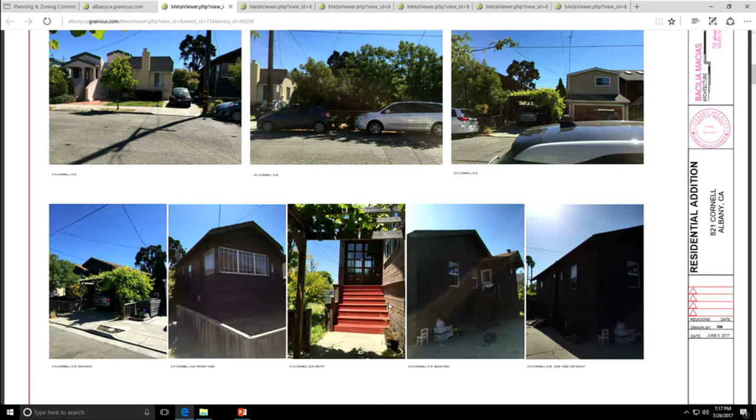This was presented to the full commission at the last hearing on July 12th. At that time, the commission continued it to a date certain of July 26th, pending some design revisions, including the garage door, some modifications to the rear French doors and deck landing, and then also some modifications to the landscape plan. And so the architect made those revisions, which are before you tonight. In fact, this is the garage door revision, which warranted quite a bit of discussion at the last hearing. We have other elevations that we can show you, but that's kind of the project scope in a nutshell.

And you received some correspondence within the last hour from adjacent property owners regarding this project. You say there have been communications. Okay. And can I ask a question of staff? From staff's perspective, were there any changes in the landscape plans that were submitted? I know that was also the topic of a lot of conversation. Yeah, there were some modifications that were made to the landscape plan, as I understand it. And we can let the applicant speak to the specifics of that. Okay, I have that same question. Any other questions?

No. All right, then I'd like to open up a public hearing before we move further on 821 Cornell. Is there anyone in the audience who'd like to address the commission on this project? Feel free to come up to the microphone. At some point we need a speaker card from you. We're going to have the applicant speak first. This is not the applicant. Okay, that's good. Is the applicant here? Yep. My name is Maura Baldwin, and I'm the landscape architect on the project, so I'm the one who addressed all the landscape issues.

Should I just review it or answer questions? Maybe you can just tell us how you responded to the comments from the last meeting. Do you have an image? It's loading, it should be coming up. Bear with us. Thank you. So I think the major issue is screening, but there are some other issues.

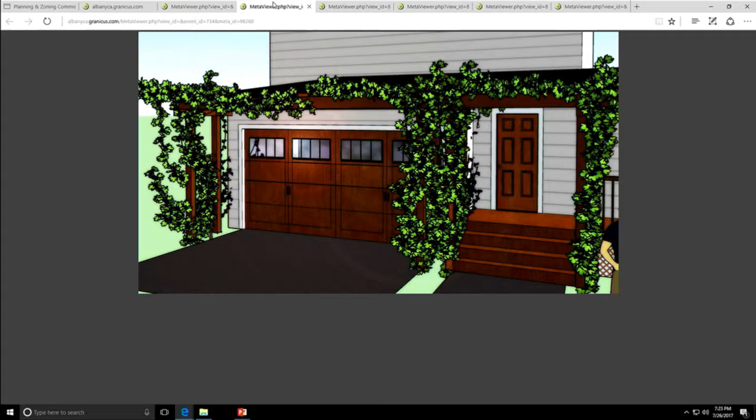Also, we wanted to illustrate that we did propose a trellis to be part of the overall front facade of the project, and working with the landscaper, we're proposing potato vines to be climbing around there so that they're evergreen and produce a nice flower. That was always in our minds because it's something that the client really enjoyed about what he has now. So I just wanted to illustrate in this graphic that the garage door, even though it is recessed, we did take some time to fine tune it a little bit.

Okay, good. Any other questions for the applicant? No? All right, good, thank you. If we have other questions, we'll call you back. Great. Okay, now, public hearing. Do you have speaker cards? Yes, we do have one speaker card. Okay. For Linda Haymaker. Okay, great.

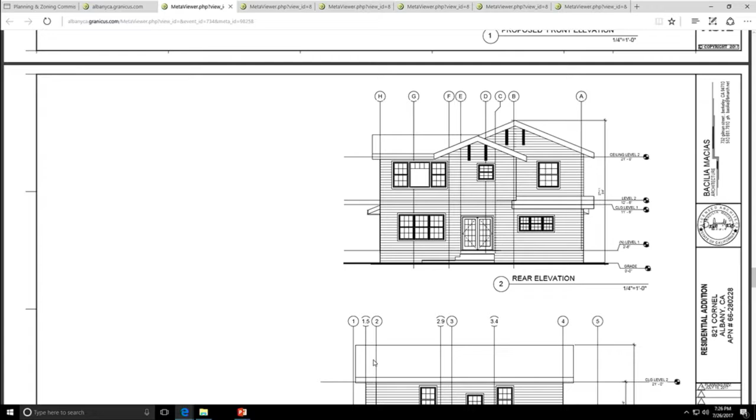And we asked if they could maybe put a small porch around it to possibly go to the side, and they said that they would consider that, or something to mitigate this direct head-on approach that would be much more intrusive to our sense of privacy and enclosure and noise issues and things like that. And I didn't see that anything was done about that.

It seems like on the deck there, if there was some problem about doing any kind of a porch enclosure, maybe they could put something on the east side of the deck that they have, directly opposite the doors, that was about 8 feet with maybe trellis on top of that, so that every time they come in and out, we as neighbors are not directly looking at them and feel sort of intruded upon. So that would be the same suggestion that we had last time, that they might address that a little bit rather than not. And we didn't feel that they did take that into consideration.

Then the rest of my issues are about, a big issue was about the terrace size. And from the plans that were submitted, it looked as though what they had proposed last time was a very large rock terrace. But when I looked at the revisions, what they wrote was that they had proposed a lawn and that we didn't like the lawn. We would love a lawn because a lawn is much quieter than rock and hard surface. So if that could be put back in the original plan as a lawn, that would muffle a great deal of sound in the back, reverberating off of these large surfaces.

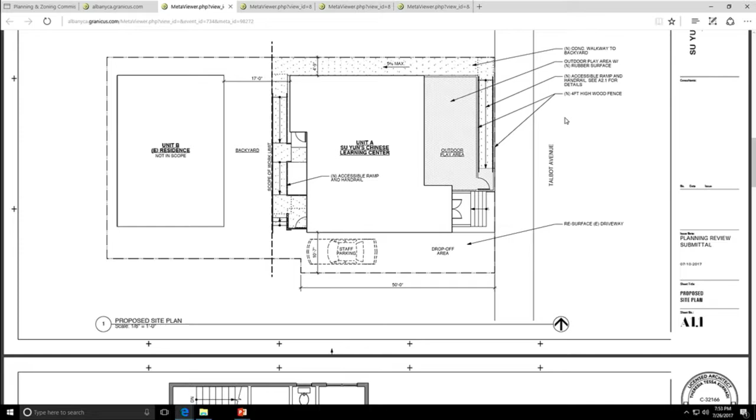Okay, thanks. So one question too. The two off-street spots you have are what's shown behind you? Right. Tandem parking? Okay. And right now, half of that's landscaping? No. Oh, I guess maybe it's an old picture. It's been ripped out. Well, I see the driveway sort of thing back there. All right, got it, okay.

Yeah, so the building owner is currently renovating this building as well as the rear building. And they're doing some municipal work with electrical and the gas, so they are going to repave the driveway. I think once the building's been painted, the repaving of the driveway and, not to be offensive, removing the blight that is currently the front yard is part of the capital improvements that we plan to make, along with the building owner, to really overall improve the lot, the structure and the land.

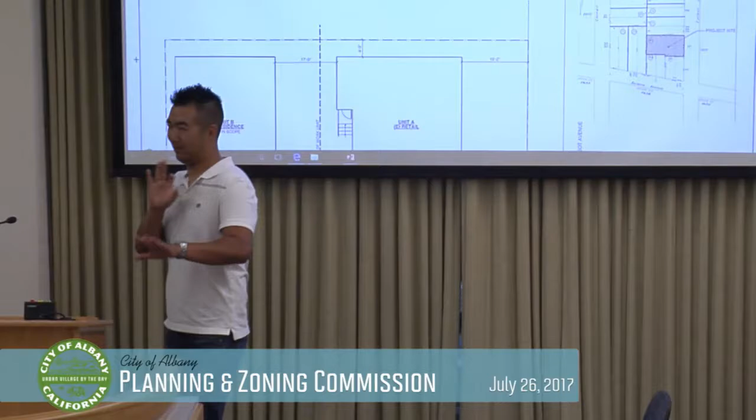So the building to the north, there seems to be a big swath of driveway. That all belongs to them? Correct. Right here, there is a pathway. You got to turn to the staff. I believe that's currently the plan for the foot access to the rear building. Again, we don't own either facility. That's access to the rear.

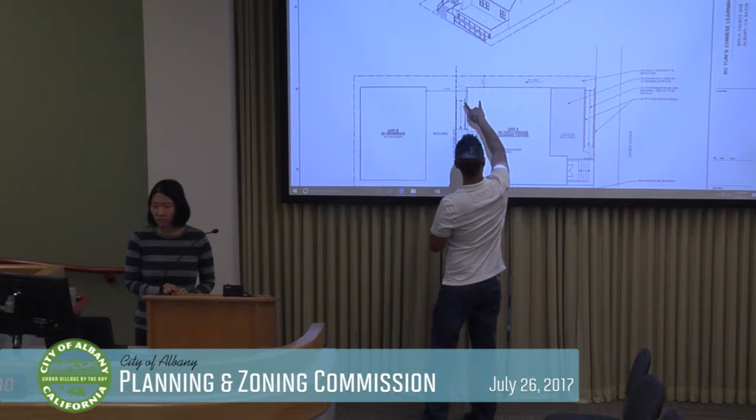Okay, got it. But you saw in one of the plans, because we do want to make this ADA accessible, we're working with the building owner to make basically a 5% grade and allow wheelchair access, since currently the building is not ADA compliant. You can't get to it. But the ramp, working with our architect, was the only way that we could actually do it.

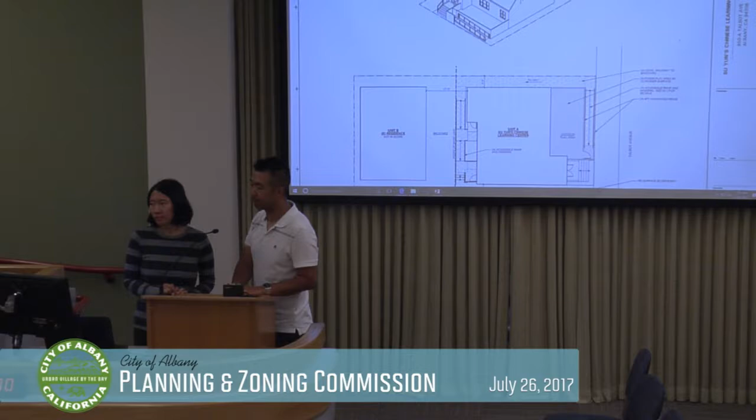Okay. Good. Any other questions? No? Okay, thank you. We'll call you back if we have some. Thank you. Oh, I have a question of staff, I think. Sure. Yes, of staff.

So some years ago, I was on a commission when VARA was approved. Did you pull the files on that at all? And I did indeed. You did indeed? Okay, good. I remember discussion about bicycle parking on that. And then I will admit, I did a lot of Saturday morning yogas there and I always rode my bicycle. Yeah, we required bicycle parking because of the traffic. We've put our standard condition of approval with this use permit to provide a bike rack as part of the business. So they will have to do that as part of their building permit improvements.

And do you know how the usage projections for VARA, when they got their use permit, compared with this project? Yeah, so it was actually a higher intensity use overall because the business had operating hours of 9 a.m. to 9 p.m. Monday through Saturday. So that compared to 1 p.m. to 6 p.m. Monday through Friday with no operating hours on Saturday was a bit more intensive.

And I think that the majority of the yoga students frankly drove. At least that was my own, I guess, I never did a count or anything like that, but just based on my own observations from having done yoga there on Saturday mornings for a long time. Most of the students drove, I think.

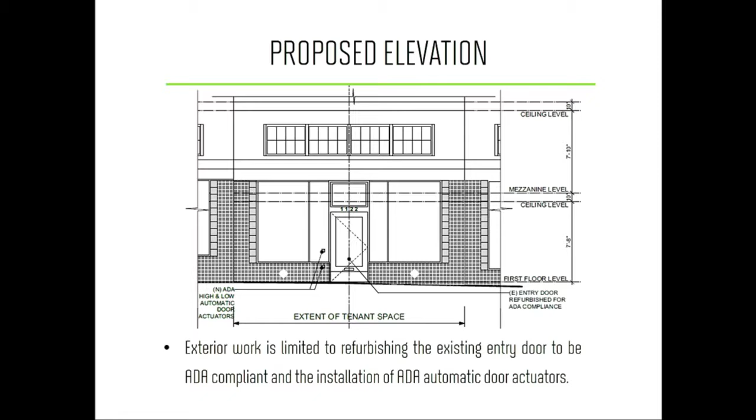Business details. The applicant is proposing a new beer tasting room. Wildcard Brewing is based in Redding, and this will be their first Bay Area location. Hours of operation are proposed to be Sunday through Thursday, 12 p.m. to 10 p.m., and Friday to Saturday, 12 p.m. to 11 p.m. 4 employees are proposed to be on site at any given time. Production activities and food services are not proposed for this location. The applicant will be operating under an ABC Type 23 duplicate license.

There are tenant improvements proposed for this project scope. Tenant improvements include new counter spaces, seating for patrons, a new bar area, walk-in cooler, ADA unisex restroom, mop sink, and storage areas. A portion of the existing mezzanine level, 17 square feet in area, is proposed to be voided to comply with building code regarding mezzanine coverage. This will result in a total of 1,453 square foot tenant space.

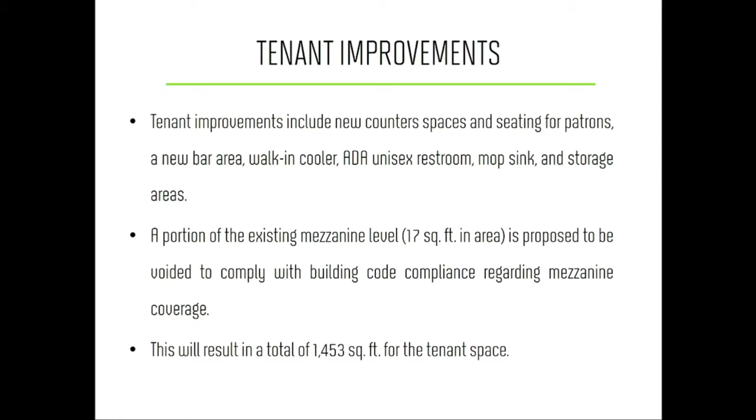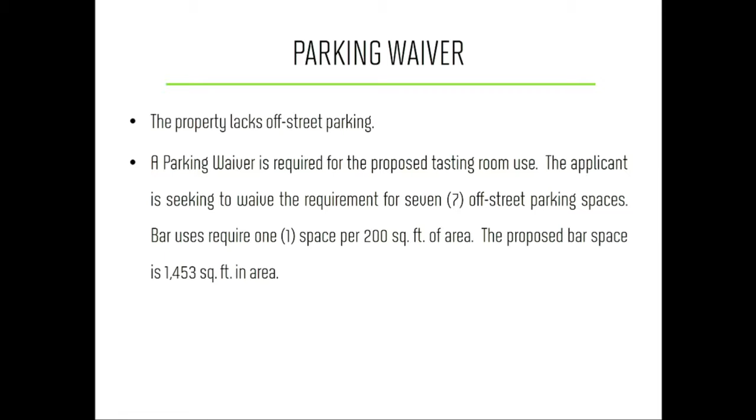Parking waiver. The property lacks off-street parking. A parking waiver is required for the proposed tasting room use. The applicant is seeking to waive the requirement for 7 off-street parking spaces. The parking requirement for bar uses in Albany is 1 space per 200 square feet of area. The proposed bar space area is 1,453 square feet in area. A parking study was conducted on Thursday, July 20th, 2017 at 4 p.m. The survey concluded that 24.2% of on-street parking is available within a 500-foot radius of the subject site.

Staff has received 3 letters of support for Wildcard Brewing Company. The project is categorically exempt from CEQA, and staff recommends that the Planning and Zoning Commission review and approve the proposed project subject to the attached findings and conditions of approval.

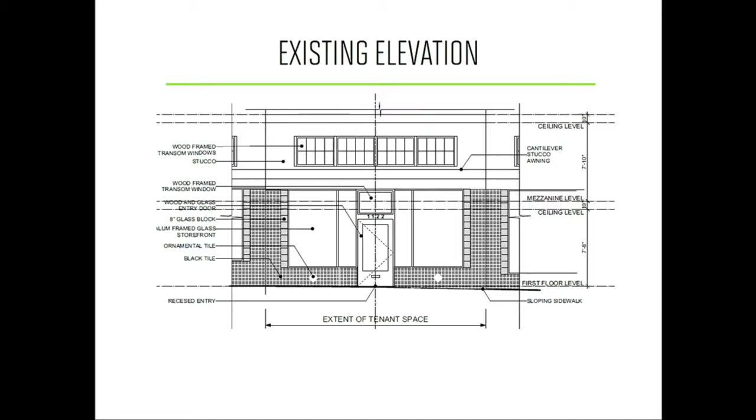Okay. Questions of staff? I have a question. This isn't retail, and so it doesn't qualify for the 1,500 square foot exemption. Is that your conclusion? Correct, and this is not new construction, which triggers that. It's not new construction, and also it fits the definition of bar. The applicant can correct me if I'm wrong, but most of the consumption will be on-site, and I believe there will be an option for growlers to be filled and taken home, but that's really the only retail component. Yeah. Okay. Other questions of staff?

So we've had a couple of these recently. There was one on San Pablo. This is a tasting room. So this is different in that they don't do any of the brewing on site. They will be bringing kegs down from Redding once a week, and then they have this refrigeration storage, so they can use the provisions as demand warrants, but they will not be doing any production on site. And the San Pablo one was? They're putting in 3 tanks. Oh, and they're doing it all on site. Whatever they called it, yeah, okay. Thank you.

Okay. Any other questions? Yeah, with the bigger structure of this building, isn't there parking at all for the whole? There is some parking, but I believe it's allocated to the apartment uses above. Yeah. It's in the rear, I think, isn't it? Yeah, a few spaces. I think there may be 9 or 10 off-street parking spaces, but I believe there's 9 apartments.

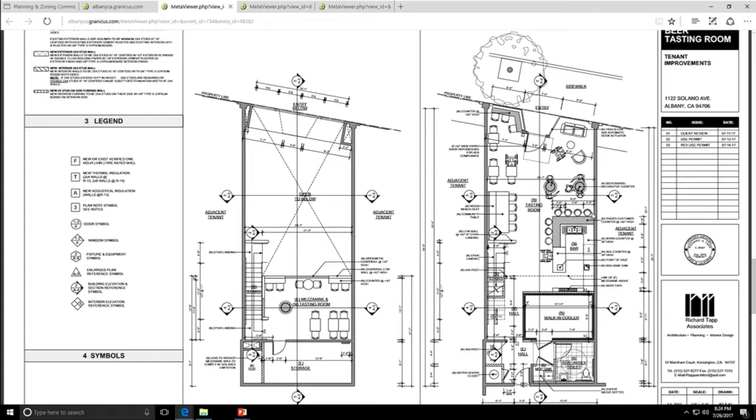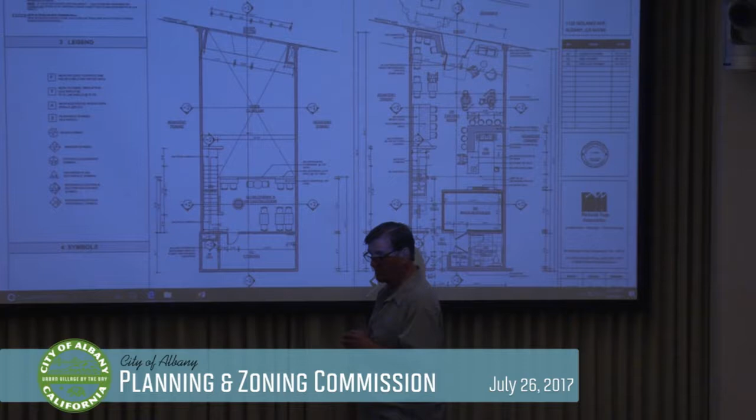So we've got the entry here, and then we've got the bar section here, the walk-in cooler, and then we've got an ADA unisex bathroom, utility areas and some storage. We do have stairs going up to the mezzanine, and then this is the mezzanine. It's open to the floor below. And the mezzanine really is a great opportunity design-wise for the customers, and it gives a completely different feel. There are some technical issues we have to deal with, which are building code items, but we've already got those resolved. And then this is an existing storage area, and to make this comply with current codes we have to void off this area here.

The ceiling heights are 17 feet there, which is great, and it gives us a good accommodation. And then, let's see, there are really no exterior changes except for the ADA for the front door. The door doesn't comply because we don't have 12 inches and 18 inches on the push side and pull side. And because it's an old building, it's not historic, but I think it's significant for the downtown. So we didn't want to do any modifications for the storefront at all.

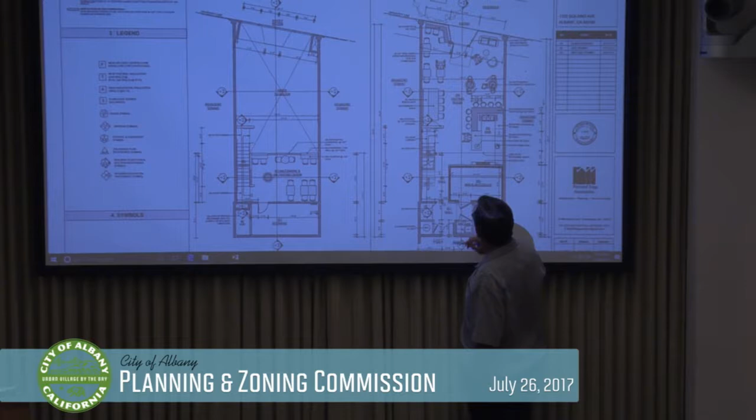And we're adding an ADA automatic door, push buttons on the outside. So that's the only exterior change. I think there is a painting upgrade to the building that's going to be done by the landlord, who's present here tonight, and signage will be done separately. That'll be a completely separate permit. So we've talked about now.

Then AC Transit is there, you know, fantastic public transport. So, and many of the businesses. The other thing too is most of the custom will be happening from 6 o'clock on. So that's when a lot of the businesses will be winding down. So I think that, you know, that meshes well. And there is some parking on the property.

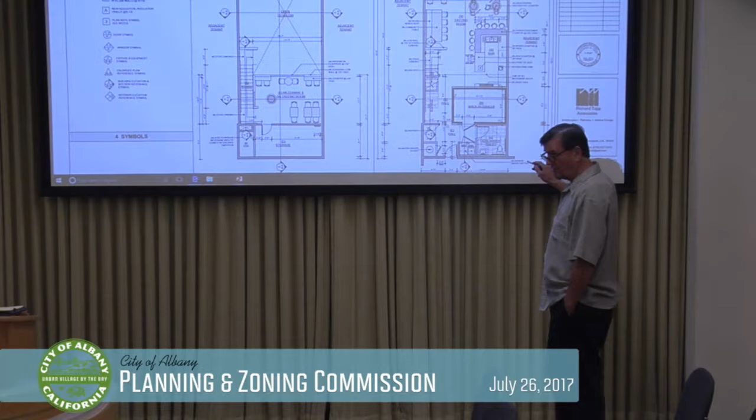There are 7 residential units above, the 4 retail or commercial units below, and there are 6 existing parking spaces in a garage, actually behind this door. This door leads back into a large parking area, or actually a 2-story space. But they're all designated and mandated for the residential tenants.

Then as far as noise, we'll definitely take care of noise on the inside. In Jenny's other facility up in Redding, they've done a good noise abatement. They're good neighbours, and they have support from the letters from the Mayor, I think, and the Chamber of Commerce. And not only that, they're good community participants too. They're in a lot of charity work. They get involved in the community, which they'll be doing here as well.

No food. So no food will be served, and none prepared or provided on site. And then no live music as part of this proposal, and then employees, Chris mentioned that there would be 4 employees on the property at one time. That's actually not correct. There will be 2 maximum employees at any one time. They've hired 4 people locally. So with the shifting and all the rest of it, it'll be basically 2 employees.

Okay. Questions? I have one. No food? I mean, don't you have to have food if you serve alcohol? No, actually, as a type 23, you do not have to have food. I think the food comes into it when you're serving hard alcohol, but with just beer tastings, it's not a requirement. It's not part of our background, so it's really something that we'd like to stay away from. You see a lot of businesses fail that start to offer a bad burger or a greasy slice of pizza, and the beer becomes secondary. Well, I guess I'm thinking of the wine tasting rooms where they always have a little bit of something to clean your palate. We've got some peanuts and pretzels maybe, but that would be the extent of it, yep.

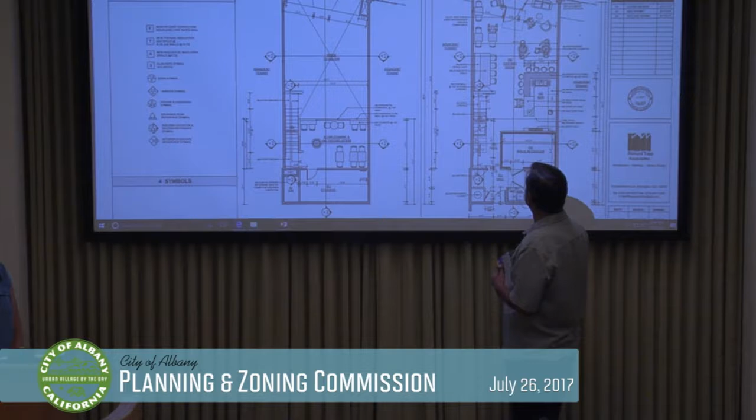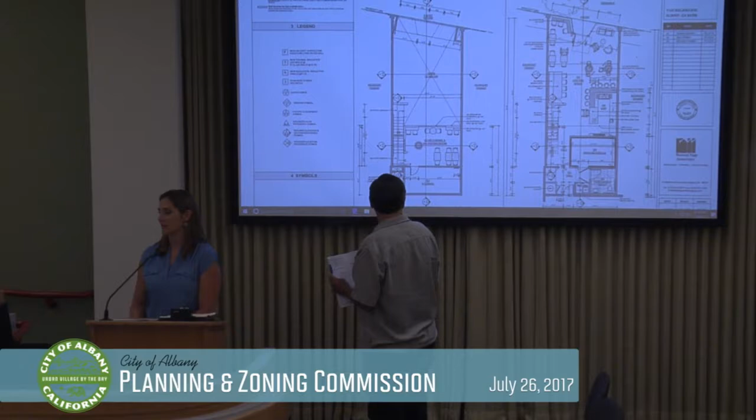I definitely agree with you that the bike racks are huge, and I, as the business owner, want the bike racks there because I know that I'm going to be asked for them anyways. We opened a year ago a second tasting room in our own downtown without bike racks, and that was the very first thing that we got asked. So where are the bike racks? I'd be here if you had a bike rack. So we immediately put them in, and I would definitely want to do this outside this building.

However, to put them inside does worry me a little bit, just as a tripping hazard. The motion of bringing those bikes in and out, you have people coming down the stairs, you turn your back from the bar with your drink, you don't realize somebody's behind you with their bike. I don't love the idea of the bikes inside, but I definitely know that that's needed. I don't know if I want to make it a condition of approval or not, but I'd really like you to think seriously about it.

We've done it with a couple of our exercise studios here. I think that some of them have agreed to say, yeah, okay, we can do that. It's for bike safety, and I think that customers with expensive bikes are going to like that and come back because they'll be able to see their bikes when they're doing business. So, I don't think they should ride expensive bikes and drink beer at the same time.

If I can address this point, my name is Ed Hemnasser. I'm one of the landlords. And it's visible from inside the space. You could see all outside. So if you have 2 bike racks outside, you could see every bike. You could be a customer, and you could still see your bike. Yeah, that's a good point. I acknowledge that's possible, yeah.

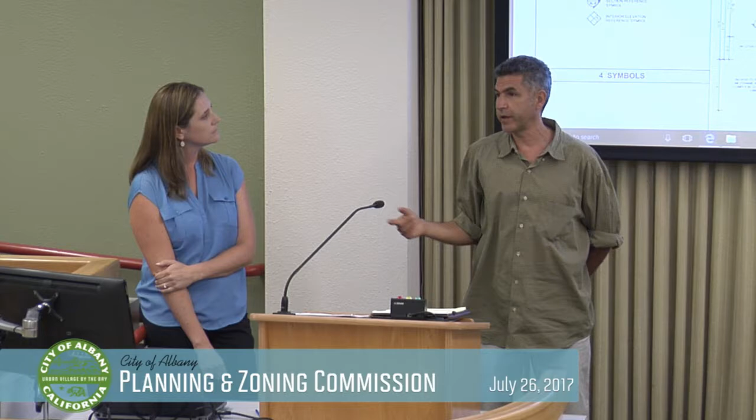Yeah, I like the stairwell. It's a big glass frontage, so it's very visible. 17-foot ceilings, even the mezzanine, you could see the outside. Everywhere you sit inside, you could see the front. So if you have the bike racks, they're visible. Okay. All right. Anything else?

And how do we determine the number of bike racks in something like this? Is it basically the space on the street? It's the availability of space on the street and what Aleida Andrino-Chavez, our transportation planner, based on her measurements, believes can be adequately accommodated there. Yeah. So I think at least one. There could be a possibility for two, depending on how they're sited.

Yeah, I do agree. That's my thinking, at least one. Yeah. Okay. Well, I want you to at least be flexible about it, because your customers may really want to be able to take their bike inside. Yeah, I think the stairwell's a great idea. It wouldn't surprise me at all. Mhm. Yeah. So, okay. Anything else? Okay. Great. Thank you very much.

Thank you very much. I'd like to open the public hearing on this item. Haven't yet, have I? Is there anyone in the audience who'd like to address the commission on this project? Seeing no one, I'll close the public hearing. Okay, bring it back to commission. Further discussion, a motion, your thoughts?

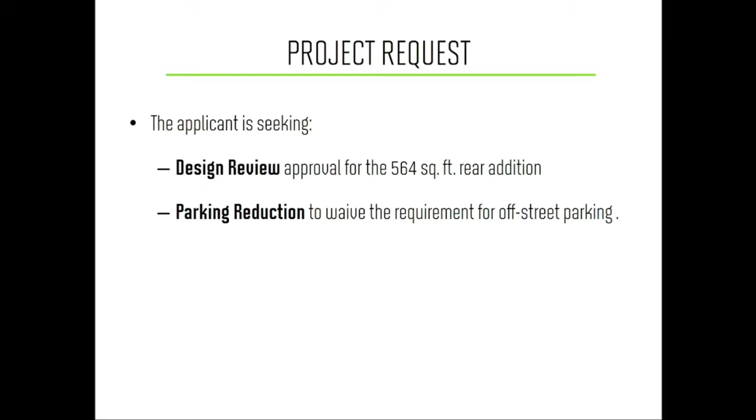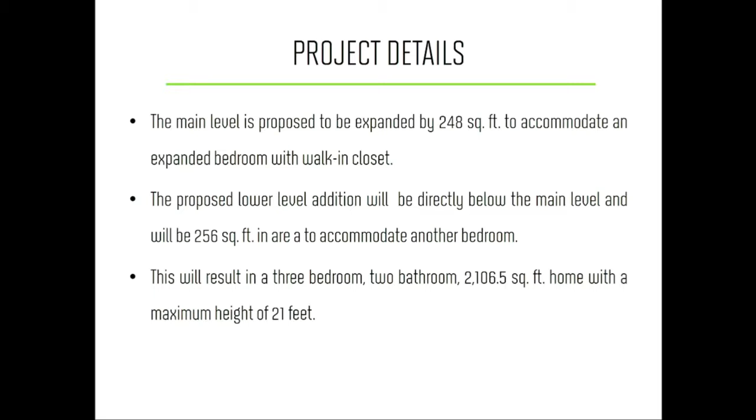Some additional project details. The main level is proposed to be expanded by 248 square feet to accommodate an expanded bedroom with walk-in closet. The proposed lower level addition will be directly below the main level and will be 256 square feet in area to accommodate another bedroom. This will result in a 3-bedroom, 2-bathroom, 2,106.5 square feet home with a maximum height of 21 feet.

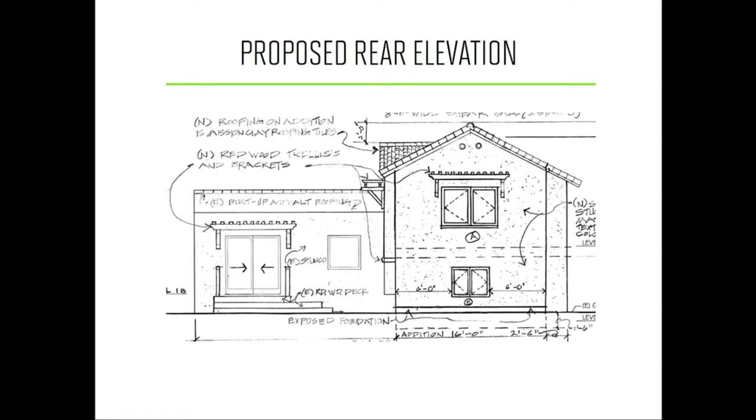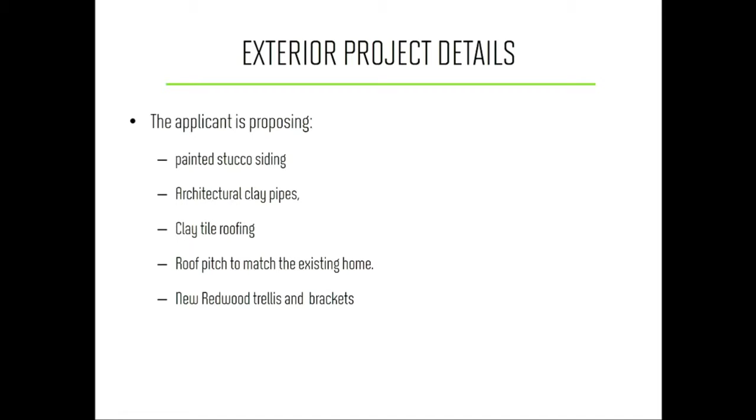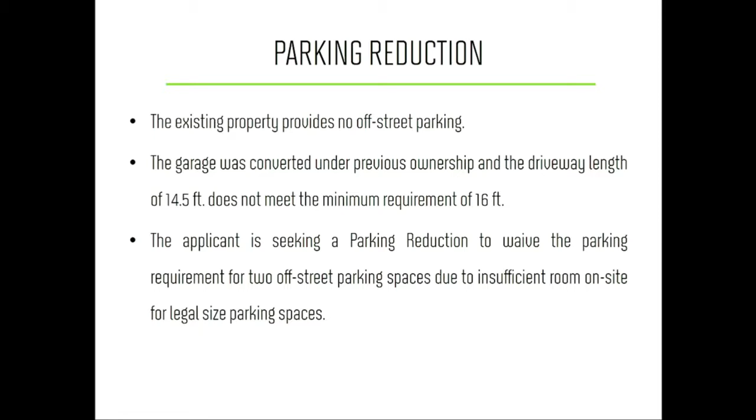Parking reduction: the existing property provides no off-street parking. The garage was converted under previous ownership and the driveway length is 14.5 feet and thus does not meet the minimum requirement of 16 feet. The applicant is seeking a parking reduction to waive the parking requirement for 2 off-street parking spaces due to insufficient room on site for legal-sized parking spaces.

No correspondences have been received by staff. The project is categorically exempt from CEQA. Recommendation: the staff recommends that the Planning and Zoning Commission review the proposed project and provide feedback to the applicant and staff. Draft findings and conditions of approval are included should the commission decide to take action. Any clarifications for staff?

I'm a little confused about the back grading, the backyard. So it's a split level, right? Yes. And so the lower level is a little below the grade, and the main level is 2-3 feet above grade. Yeah, I think that's correct. And we can let the applicant speak, but I believe the finished floor of that lower level is lower than the natural grade. It's like 18 inches into the grade. Okay. Yeah. All right. Thanks.

I was actually a little confused by that. The title says single story. But do you characterize it as a single story? This is actually a 2-level addition, and it's that lower level coming out and then the level above it, the existing split level. Yeah, I had the same question because the title of the matter was for a single-story addition. I don't know if you had other questions. No, that was it. Just trying to make sure I understood.

So, yeah, one more follow-up question. So being that it's sunk in the ground, there's no egress from the lower rear bedroom out to the yard? I think the window on the rear elevation of that lower level may have the 24-inch clear for egress. I don't know how high above finished. No, I mean, not for emergency, I mean for regular walking to the backyard, there's no... Oh, a means of egress simply to access the rear yard? No, I don't believe they have that on the lower level. Those are emergency. Okay, got it, all right.

Oh, and one thing that is a real question, which is, it seemed from the staff report like the garage conversion wasn't something that was permitted. Is that correct, or you just were not sure? We found something murky in our records that suggested it was done with a permit in the mid-'80s. I say murky because it had an entry for garage repairs and work, but it didn't explicitly say conversion, but it did identify foundation work and electrical and other upgrades to make it habitable. Okay. Thanks.

Okay, any more questions at this point? So on that murky permit, when you said make it habitable, did it show the bathroom? We didn't have any floor plans with it. It was a simple entry on a permit card that just had a written description of the work. Definitely murky. I think we're probably ready for the applicant, if you want to come up and tell us a little bit about your project.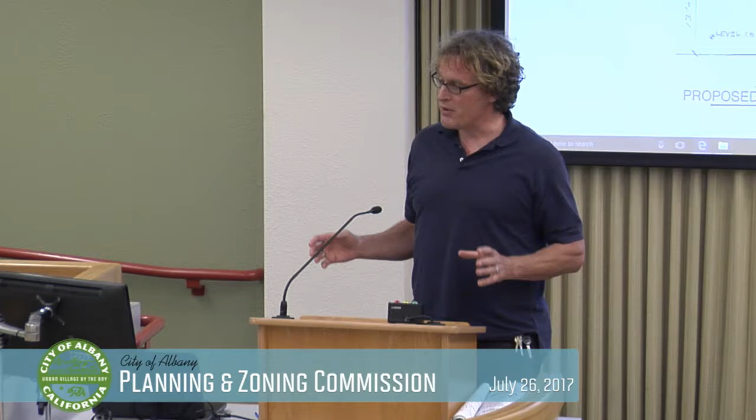So there's a number of issues. There is one non-code conforming space on the front, and the parking space is 14 feet and some minor amount of inches to the city setback. But to the sidewalk, we actually do have 16 feet. And as part of the plan here, we are widening that driveway. And yes, it's non-conforming, but there is an ability to park 2 small cars there if you allow 1 foot to hang over onto the city setback, but it will not cut into the sidewalk.

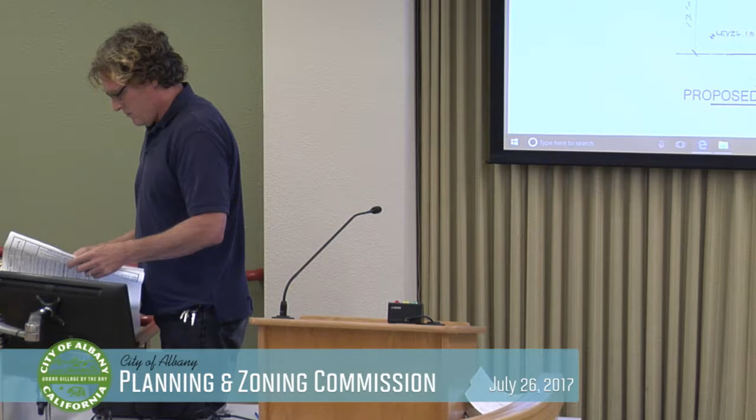So that's one thing. There was a seismic retrofit permit, which I've included in the drawings, that shows the layout of the downstairs. That was done, I don't know how many years ago, but I included that in the drawing so that you can see it, on page 5. It does show the existing bathroom down there. It also has a kitchenette in that room, which is part of this project. We are removing that kitchenette.

It is a 2-story addition. The backyard is sunken, but there is access out through the back of the lower bedroom that goes to the family room, and then there's a side door out the garage that gives you access to the backyard. But it is not an access straight off of the bedroom into the backyard. There are 2 sets of windows, one of which is an egress window, and that is on the south elevation.

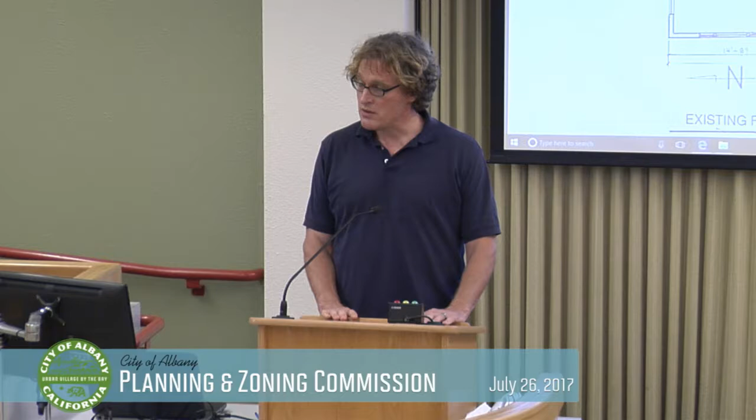Okay, so that brings up another question I have about the landscape, because it's minor, but the landscape plan shows a walkway going to the side of the rear, like a brick path that goes to the window. The whole lot has been extensively landscaped, so our plan is to interrupt that landscaping as minimally as possible. Oh, is this an existing plan, or is this a proposed site plan and landscape plan? So that brick path, you're adding a new brick path. There's a side path that goes down the whole north side of the place to the front of the driveway.

That's a concrete path. No, going from the wood deck to the new rear bedroom, there's a brick path, but it leads to a window. Well, it leads across the windows, right? Oh, to the astroturf, got it. Okay, yeah, that makes sense now. So there's a set of stairs down that used to go into the doorway, and that leads out to the backyard. The deck empties off the north side of the deck, not off the back. Okay. And why that strip of exposed gravel?

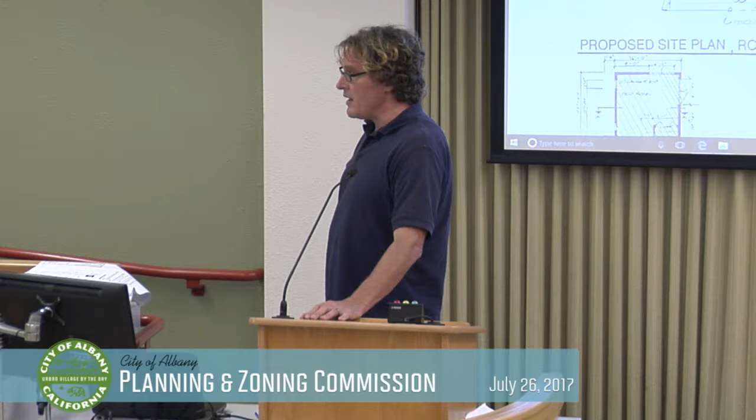Is there like a plastic, can you put a plastic waterproof membrane under the concrete, or is that not structurally sound? You can, but under the concrete you cannot resist hydrostatic pressure when you're doing waterproofing. You have to drain the pressure, which means there needs to be a drainage system under the floor slab and at the perimeter. You can Bituthene off the sides, and you frequently put what's called a vapor barrier underneath the concrete. But a vapor barrier cannot resist hydrostatic pressure.

And so if the water table actually rises to within 6 inches of the ground, which it frequently does in this area, it's like putting a bowl upside down into your kitchen sink. It tends to push up. This is not a good thing. Yeah, okay.

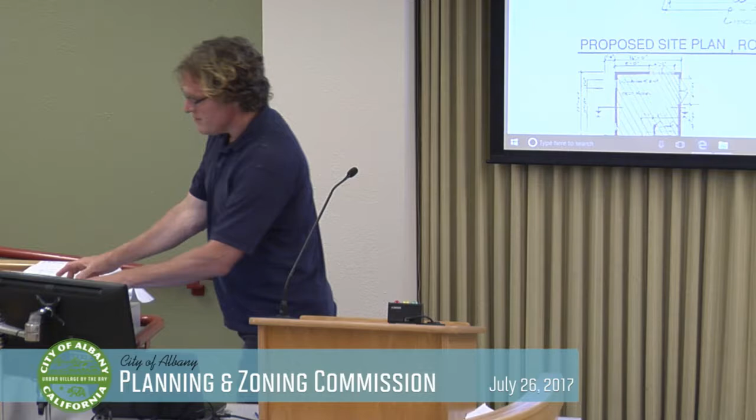Thanks. Okay. Any other comments? No? Okay, thank you. We may have you come back up. Why don't we open up to a public hearing? Ann, do you have any speaker cards? No speaker cards. Okay, we'll close the public hearing then. Any thoughts, comments? So we're being asked two things, one on design review and the parking exception.

Well, I think this is 14.52 to the property line plus another 1.73 to the sidewalk. So what's that? 15.5, 16 feet. That's, yeah, most cars, unless it's a minivan, could probably fit in there. So I take that point. That makes a lot of sense. We've done this on some of the smaller lots we were looking at last year. We've allowed them. They weren't legal spots, but we understood that people could be parking there.

I'd like to add one more salient detail, and that is this is a street that only has houses on one side, and cars on the other side. So there's always parking available on the other side of the street. There are no houses. Yeah, that's a good point. Thank you. So yeah, I'm not so concerned about the parking waiver on this project.

Yeah, and I'm not concerned either. I just generally don't like the idea that there was perhaps an unpermitted conversion, and then you sanction it later on. But I wouldn't penalize you for something that a prior owner did. And it doesn't sound like there is a concern or a constraint with parking on the site.

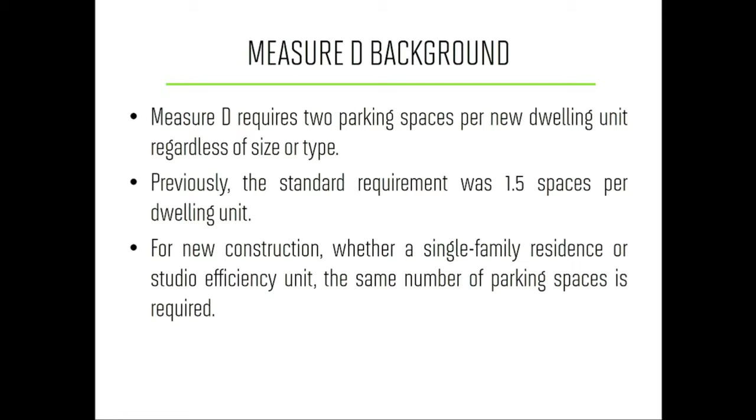So just to refresh your memory, on November 8th of last year, the Albany voters approved Measure N1, which establishes new language in the city's planning and zoning code, that's Chapter 20, and gives the authority to city council to set residential parking standards for new construction through a conventional ordinance amendment process. Measure D, when it was approved in 1978, required 2 parking spaces per new dwelling unit regardless of size or type. Previously, the standard requirement was 1.5 spaces per dwelling unit. So for new construction, whether it was a single-family residence or an efficiency unit, the same number of parking spaces was required.

So within this past year, the commission has reviewed this as a study session item in January, February 8th, and April 26th, providing feedback at each review. Then we had our study session at the end of June to review the San Pablo Avenue specific plan, just to give you some additional context on how they're doing their parking for infill development. And so what we have before you tonight is the final draft, which was part of your packet. So we did some additional refinement from April 26th.

We incorporated parking exceptions for affordable housing with a TDM package and/or bicycle parking in the residential uses table. We've included language about incentives for affordable housing as it relates to car parking, and we've also cross-referenced the definition as part of the residential use classifications. Under two-family dwellings, this was Eric's suggestion that we include a condition for reducing the parking requirement based on a 300-foot radius survey. We've defined bicycle space, and then we've made some other very minor miscellaneous revisions based on commission feedback, little things here and there like changing a word, just minor content.

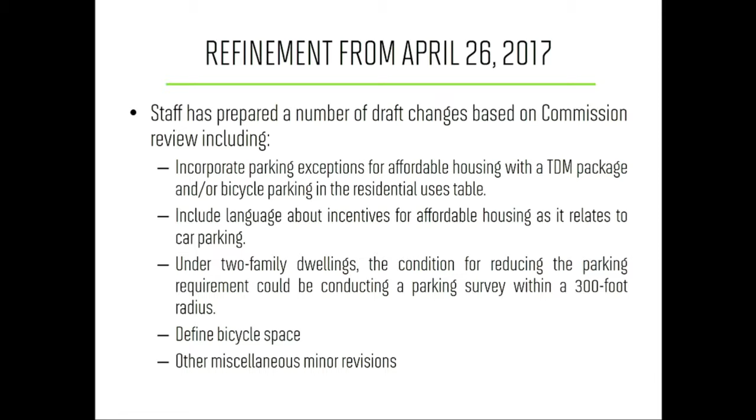So with that, one of the big things that was discussed was parking maximums. This was in an earlier discussion, then of course, focus of the San Pablo Avenue specific plan study session. So we looked at this and we also talked to our city attorney. And so in general, the parking provisions which exist in the zoning code provide a base minimum standard and legal threshold for development. The minimum requirement is established and codified in local regulations to institute a consistent development standard for projects throughout the city. And a maximum standard is typically used to prevent new development from providing more parking than what is desired. Based on city attorney review, it was the conclusion that a maximum standard would be more appropriate to incorporate in a separate policy document, such as a specific plan, design guidelines, or overlay district, rather than in the municipal code.

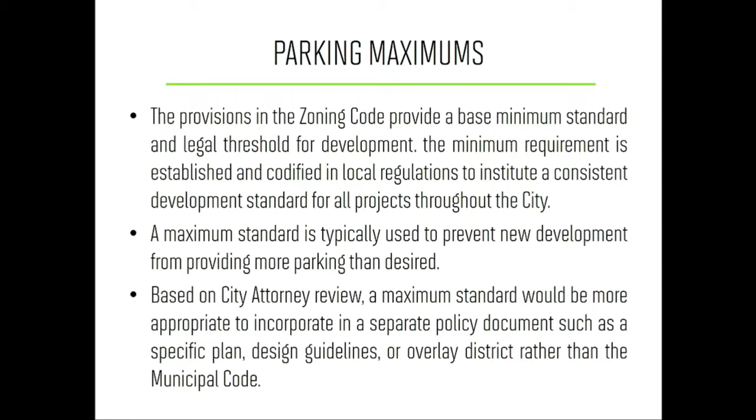We also took this to Traffic and Safety for some preliminary review in May of this year. They gave us some helpful feedback as well and recommended some minor modifications related to long-term bicycle parking and refining that definition, defining bicycle rack space, and then other minor language tweaks to bike lockers, all of which have been incorporated in the latest draft.

The proposed amendments are exempt from CEQA pursuant to section 15061(b)(3). And just as a point of reference, parking is not identified as a potential project impact in the CEQA checklist. And with that, we've provided you with a draft resolution, Reso 2017-05, which, if you adopt it tonight, would forward a recommendation to City Council to approve amendments to the parking regulations. And if you move forward, we anticipate taking this to the City Council after the recess, probably sometime in September or October.

Okay, so if we make some suggestions tonight, then probably they're the kind of thing that you would do, and then move it on to the council. That'd be exactly our objective, rather than bring it back to us again for a final proof thing. Right. Okay. Yeah, and it's in their strategic plan to get it done within the calendar year. I mean, that would be the optimal outcome. Yeah, okay. All right, any other questions of staff?